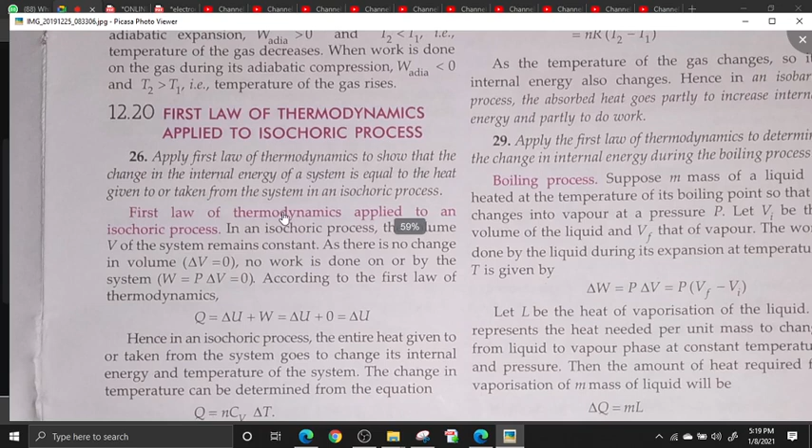Apply first law of thermodynamics to show that the change in internal energy of a system is equal to the heat given to or taken from the system in the isochoric process. First law of thermodynamics applied to an isochoric process. In an isochoric process, the volume V of the system remains constant as there is no change in the volume. Delta V equals to 0.

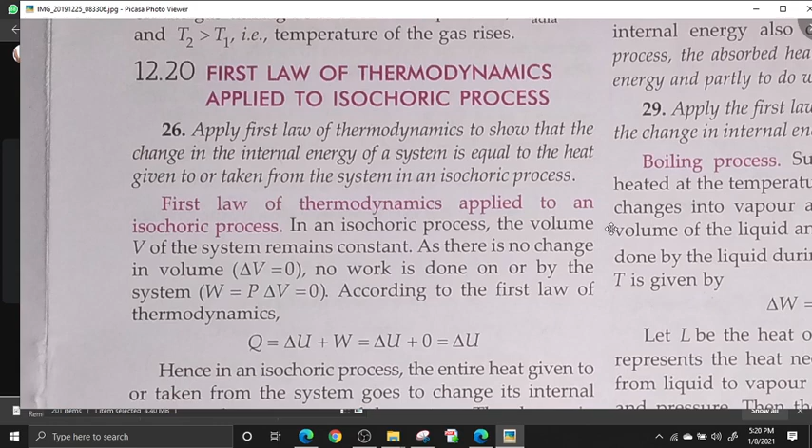No work is done on or by the system. W equals to P delta V equals to 0. According to the first law of thermodynamics, Q equals to delta U plus W equals to delta U plus 0 equals to delta U. Hence, in an isochoric process, the entire heat given to or taken from the system goes to change its internal energy and the temperature of the system. The change in temperature can be determined from the equation Q equals to nCv delta T.

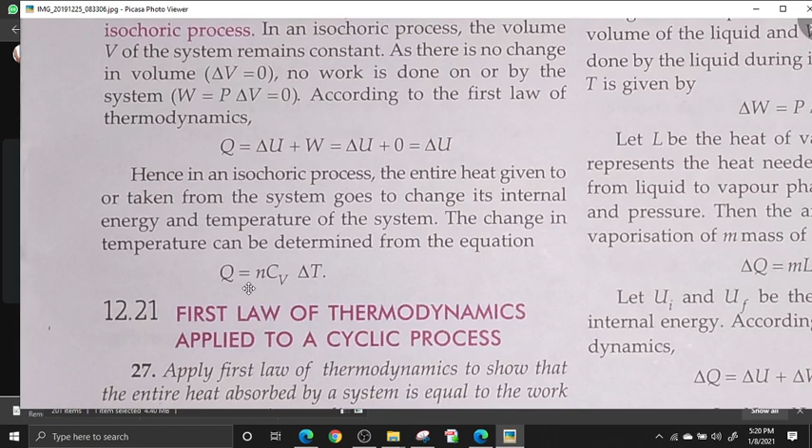First law of thermodynamics applied to a cyclic process. Apply first law of thermodynamics to show that the entire heat absorbed by a system is equal to the work done by the system in a cyclic process. First law of thermodynamics applied to a cyclic process. In a cyclic process, the system returns to its initial state after undergoing a series of changes.

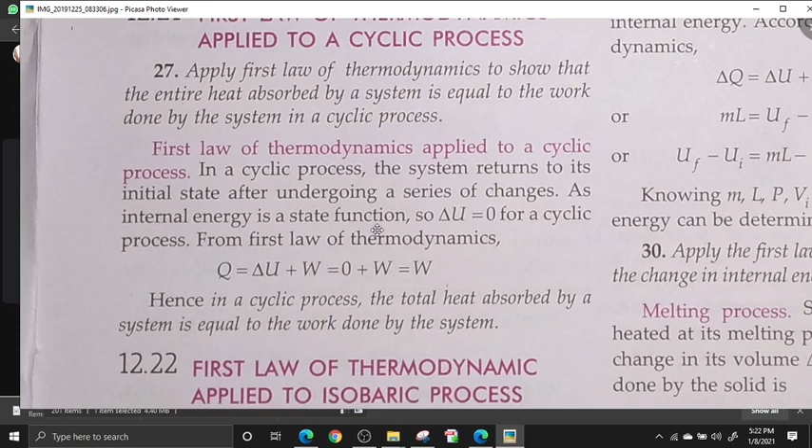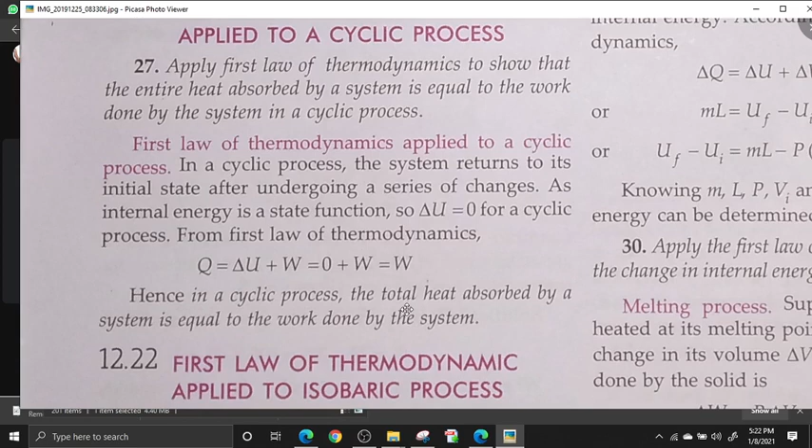First law of thermodynamics applied to a cyclic process. In a cyclic process, the system returns to its initial state after undergoing a series of changes. As internal energy is a state function, delta U equals to 0. For a cyclic process, first law of thermodynamics, Q equals to delta U plus W equals to 0 plus W equals to W. Hence, in a cyclic process, the total heat absorbed by the system is equal to the work done by the system.

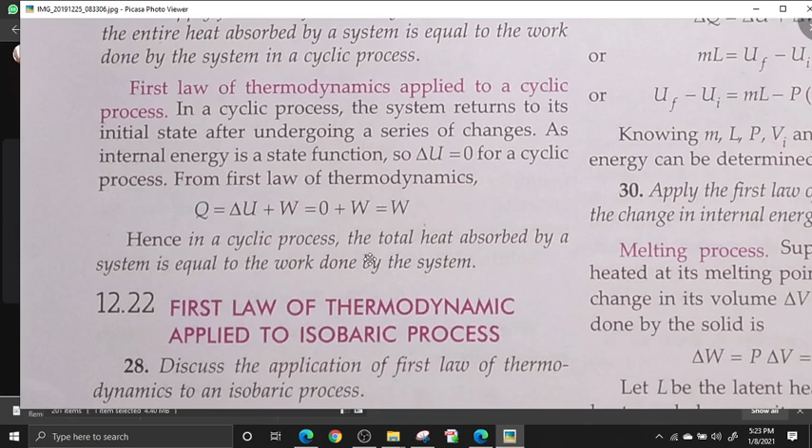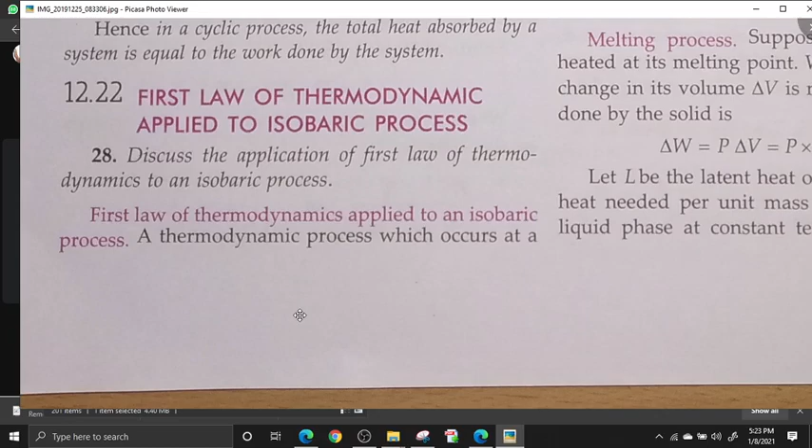First law of thermodynamics applied to isobaric process. Discuss the application of first law of thermodynamics to an isobaric process. A thermodynamic process which occurs at constant pressure is called an isobaric process. For example, freezing of water, formation of steam, etc.

Suppose the pressure P of a gas remains constant and its volume changes from V1 to V2, then the work done by the gas is W equals integration of V1 to V2 P dV equals P integration of V1 to V2 dV equals P(V2 minus V1) equals nR(T2 minus T1), as the temperature

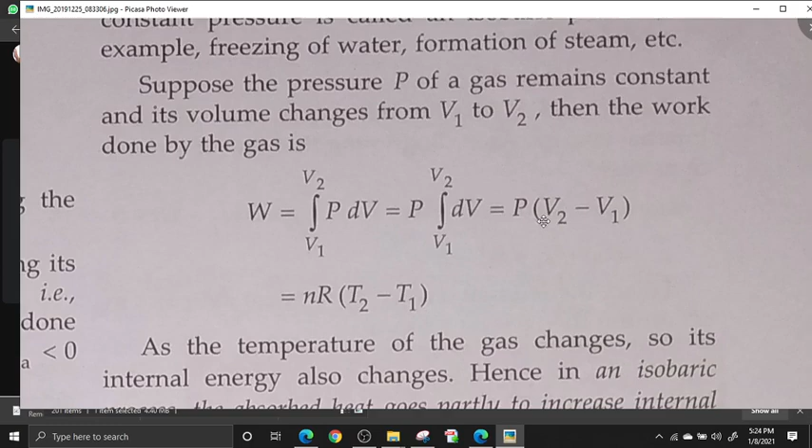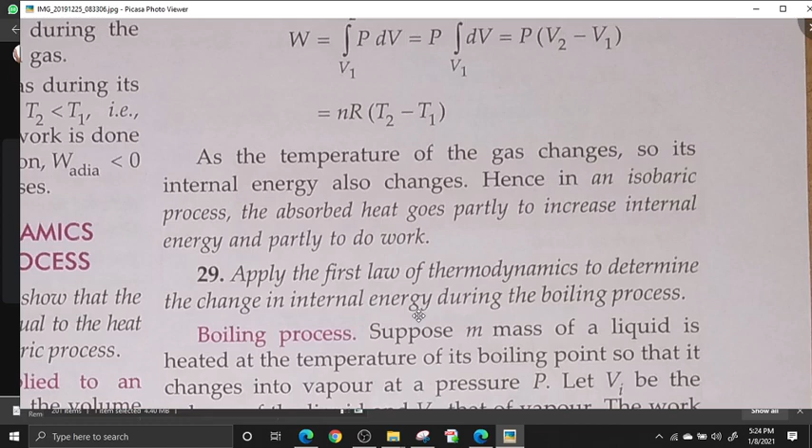As the temperature of a gas changes, so its internal energy also changes. Hence, in an isobaric process, the absorbed heat goes partially to increase internal energy and partially to do work.

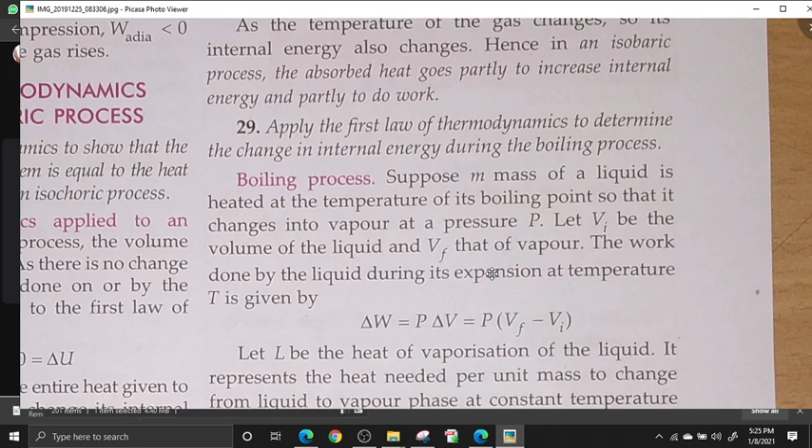Apply the first law of thermodynamics to determine the change in internal energy during the boiling process. Boiling process: Suppose m mass of a liquid is heated at the temperature of its boiling point so that it changes into vapor at a pressure P. Let Vi be the volume of the liquid and Vf that of vapor.

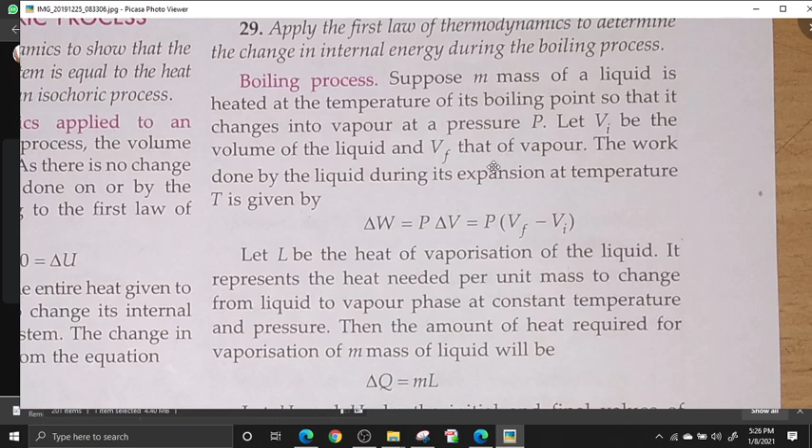The work done by a liquid during its expansion at a temperature T is given by delta W equals P delta V equals P(Vf minus Vi). Let L be the heat of vaporization of the liquid. It represents the heat needed per unit mass to change from liquid to vapor phase at a constant temperature and pressure. Then the amount of heat required for vaporization of a mass m of liquid will be delta Q equals mL.

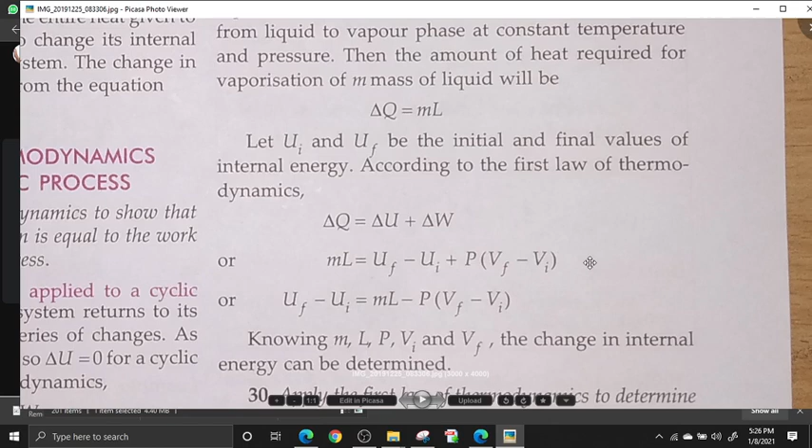Let Ui and Uf be the initial and the final values of the internal energy. According to the first law of thermodynamics, delta Q equals delta U plus delta W, or mL equals Uf minus Ui plus P(Vf minus Vi), or Uf minus Ui equals mL minus P(Vf minus Vi). Knowing m, L, P, Vi and Vf, the change in internal energy can be determined.

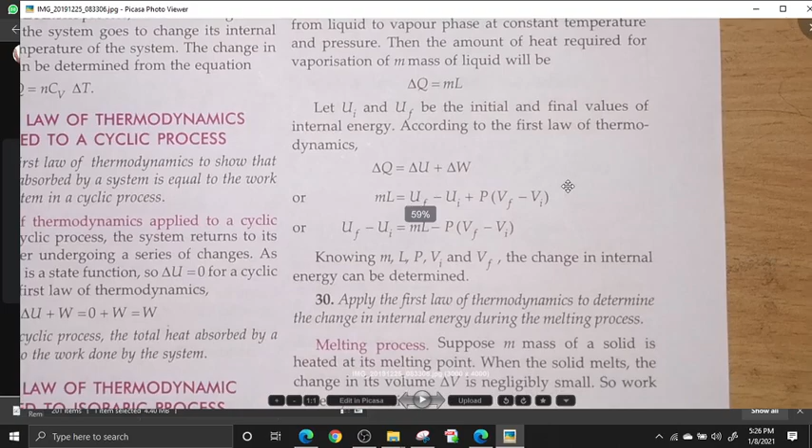Apply the first law of thermodynamics to determine the change in internal energy during melting process.

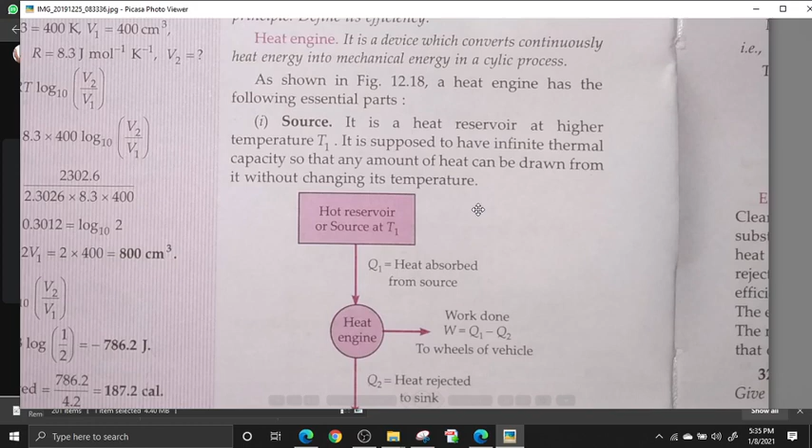Sink. It is a heat reservoir at a lower temperature T2. It also has infinite thermal capacity so that any amount of heat can be added to it without changing its temperature. Third, working.

Working substance is any material, solid, liquid, or gas, which performs mechanical work when heat is supplied to it. For example, a mixture of fuel vapor and air is used in a gasoline or diesel engine, or steam in a steam engine.

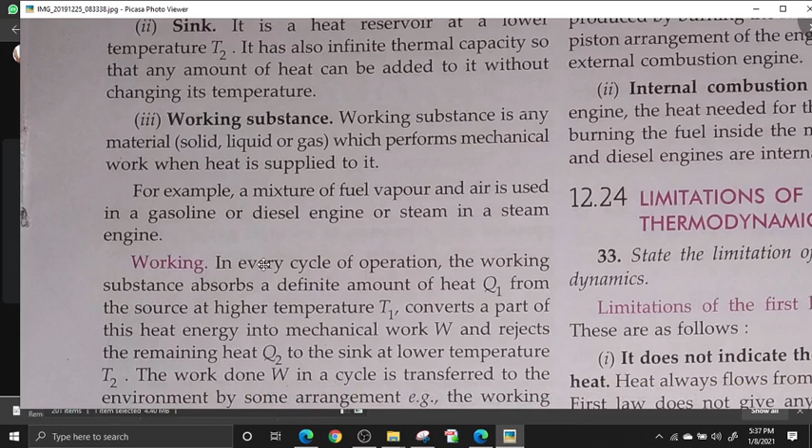Working: In every cycle of operation, the working substance absorbs a definite amount of heat Q1 from a source at a higher temperature T1, converts part of this heat energy into mechanical work W, and rejects the remaining heat Q2 to the sink at a lower temperature T2. The work done W in a cycle is transferred to the environment by some arrangement. For example, the working substance may be in a cylinder with a moving piston that transfers mechanical energy to the wheels of a vehicle via a shaft.

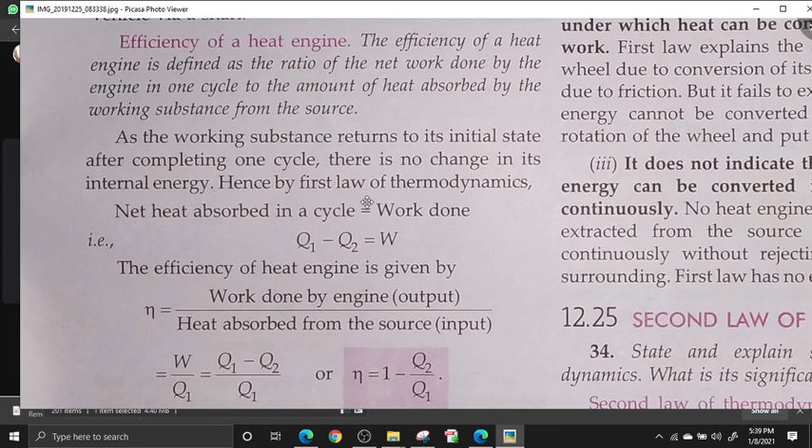The efficiency of a heat engine is defined as the ratio of the net work done by the engine in one cycle to the amount of heat absorbed by the working substance from the source. As the working substance returns to its initial state after completing one cycle, there is no change in its internal energy. Hence, by the first law of thermodynamics, net heat absorbed in a cycle equals work done, that is, Q1 minus Q2 equals W.

The efficiency of a heat engine is given by:

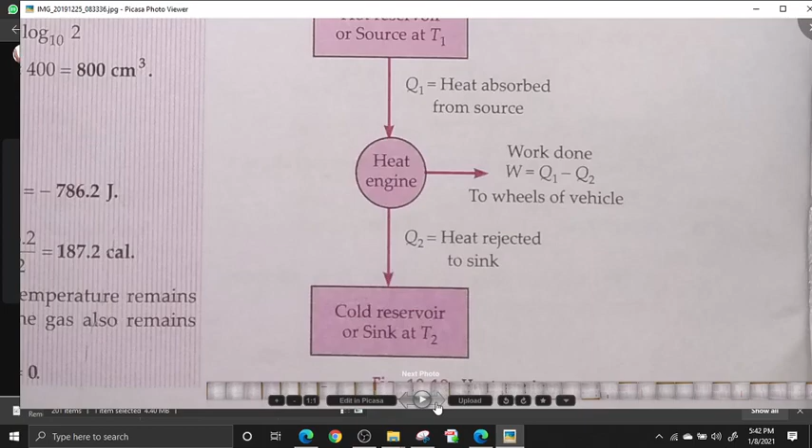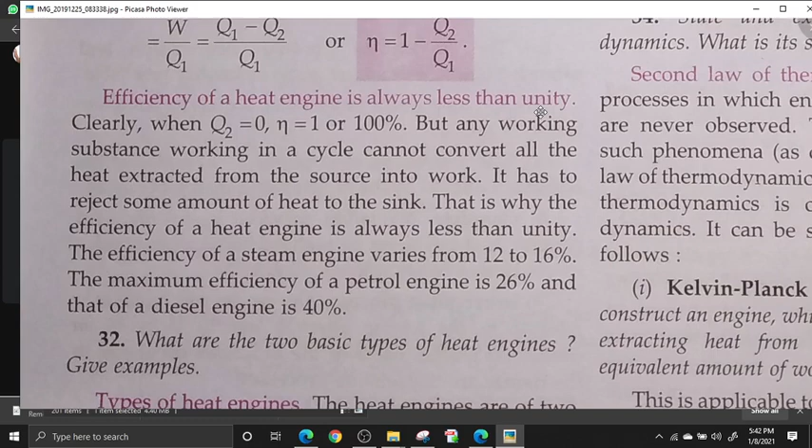Efficiency of a heat engine is always less than unity. Clearly, when Q2 equals 0, eta equals 1 or 100%, but any working substance working in a cycle cannot convert all the heat extracted from the source into work. It has to reject some amount of heat to the sink. That is why the efficiency of a heat engine is always less than unity. The efficiency of a steam engine varies from 12 to 16%. The maximum efficiency of a petrol engine is 26%, and that of a diesel engine is 40%.

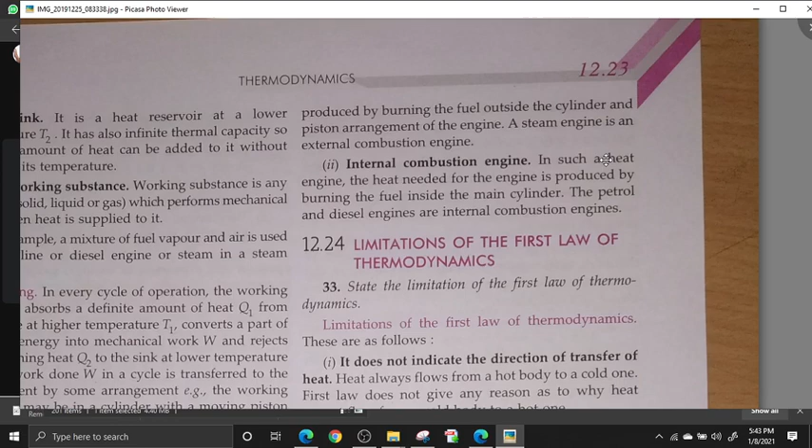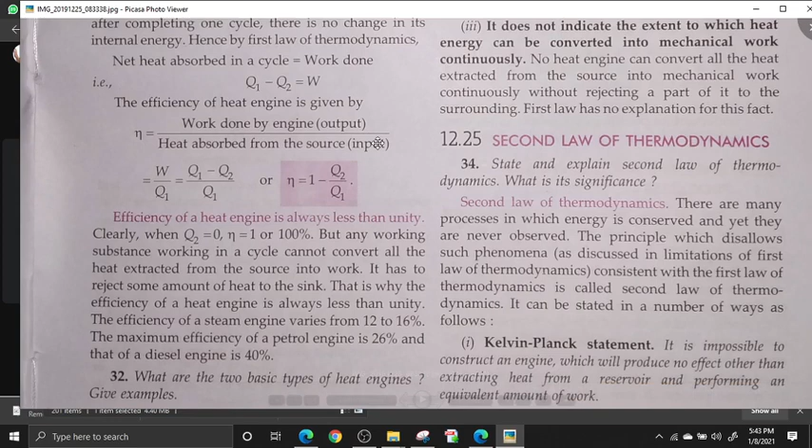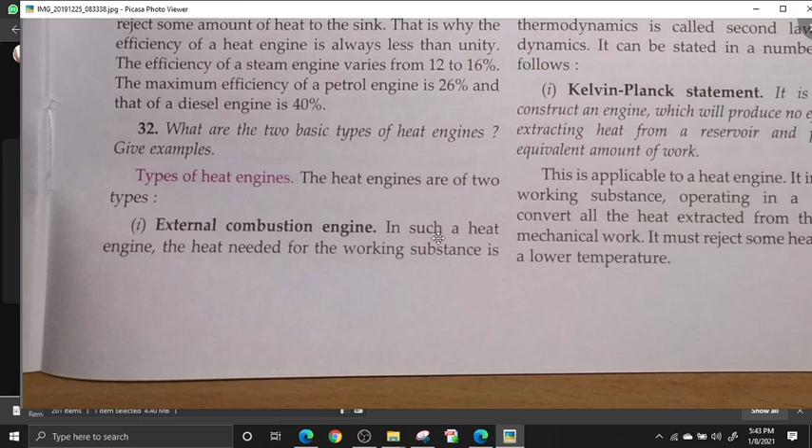External combustion engine: In such a heat engine, the heat needed for the working substance is produced by burning fuel outside the cylinder and piston arrangement of the engine. A steam engine is an external combustion engine.

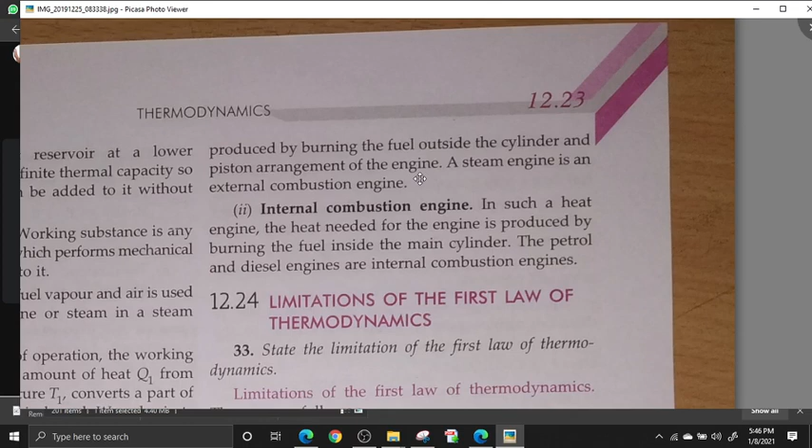Internal combustion engine: In such a heat engine, the heat needed for the engine is produced by burning fuel inside the main cylinder. The petrol and diesel engines are internal combustion engines.

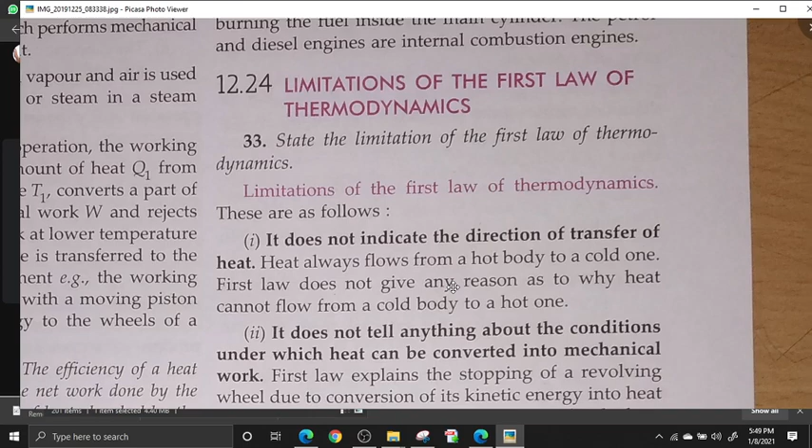It does not tell anything about the condition under which heat can be converted into mechanical work. The first law explains the stopping of a revolving wheel due to the conversion of its kinetic energy into heat due to friction, but it fails to explain why the heat energy cannot be converted back into kinetic energy of rotation of the wheel and put it back into rotation.

It does not indicate the extent to which heat energy can be converted into mechanical work continuously. No heat engine can convert all the heat extracted from the source into mechanical work continuously without rejecting a part of it to the surroundings. The first law has no explanation for this fact.